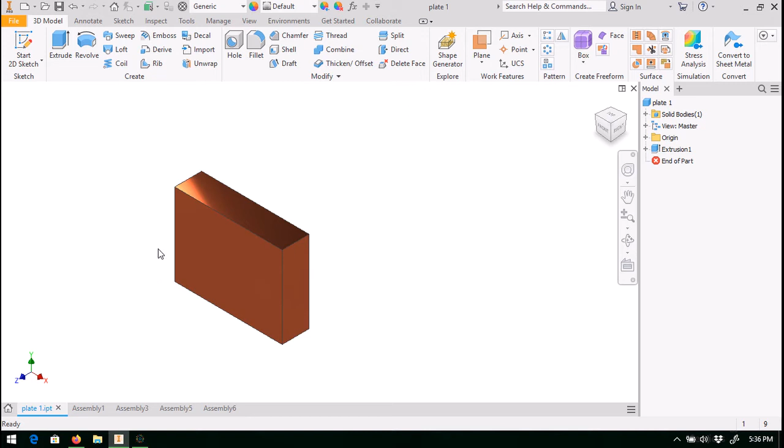To create the assembly, come to File, then click New, and then click Assembly.

Now there's a couple of different ways to bring parts into the assembly module. The first approach is to use the Place icon up here, go find the file, and bring it in. Another way is to right click, hit Place Component, and go to the folder with your part. In this case, I want to open up what I'm calling Plate 1, and then hit Open.

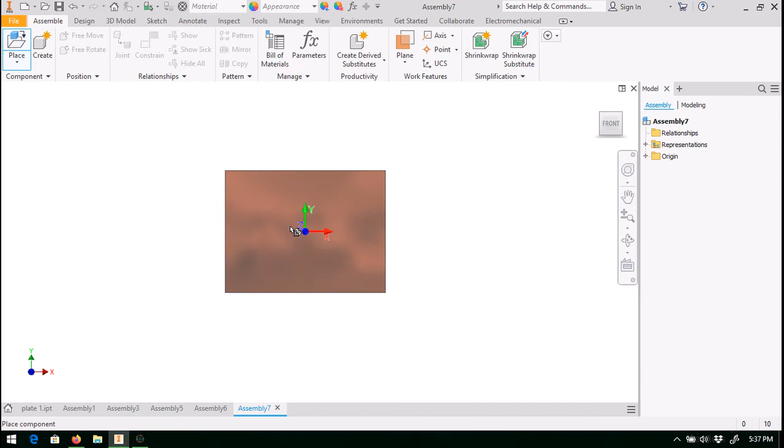You can move the part to pretty much any location on the screen with a left click, and as I move the mouse around it will let me create multiple instances of the same part. In this case I just want the one part here, so I'll click Escape, and then repeat this procedure for Plate 2.

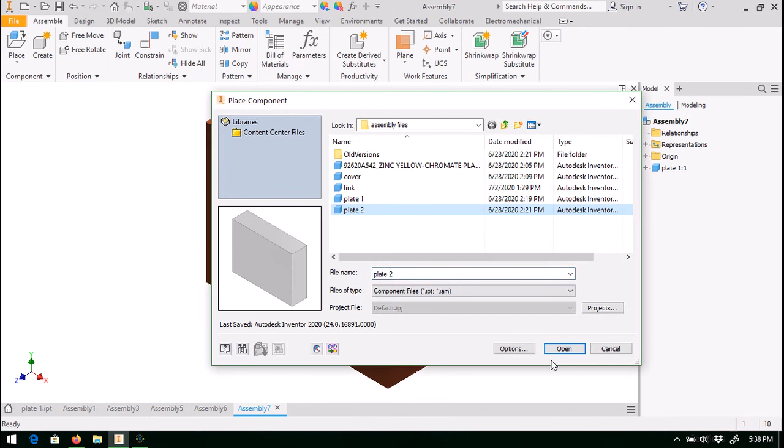We'll just left click and then click OK. So I now have an assembly, because as long as I have more than one part, I've created an assembly.

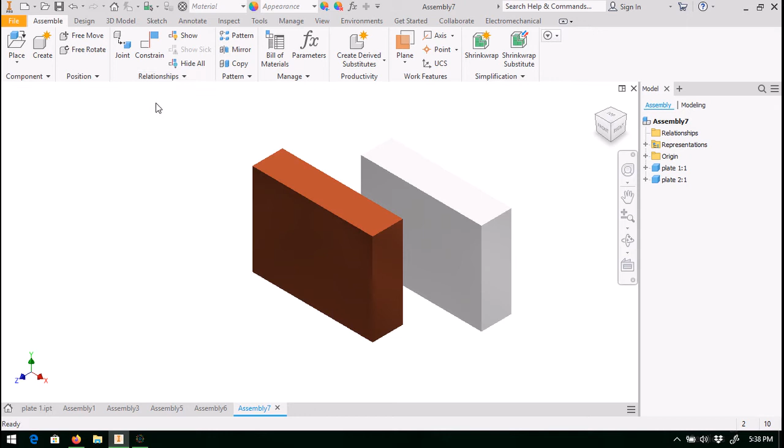To show you the most basic way to put things together, come up to the Relationships section and click on Constrain. Under the Assembly tab we now have 5 different options, and one of the more common ones is the mate type.

We have 2 different solutions, and the difference between them comes down to how the mate is oriented. Notice we're looking at the surface vectors: in the first one, known as mate, they're opposing one another, pointing at each other, whereas in the flush solution the vectors point in the same direction.

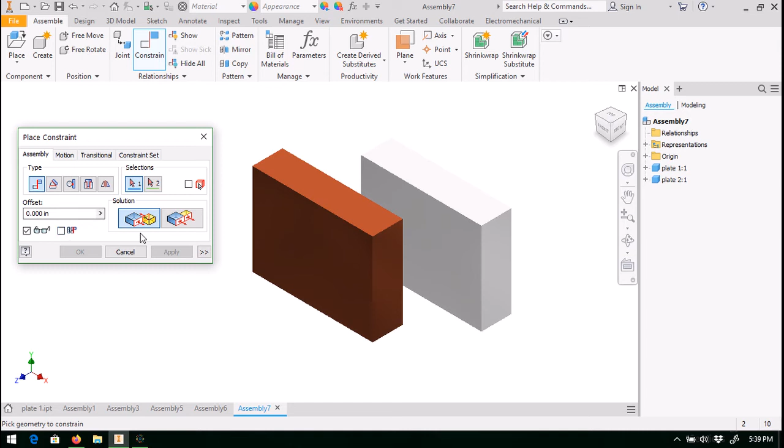For the sake of argument, let's click on mate, and look at the mate solution. Let's mount this surface to this surface. I should point out that what you're seeing right now, after that audible popping noise, is technically a preview of the mate. The mate is not actually created until you click OK or Apply.

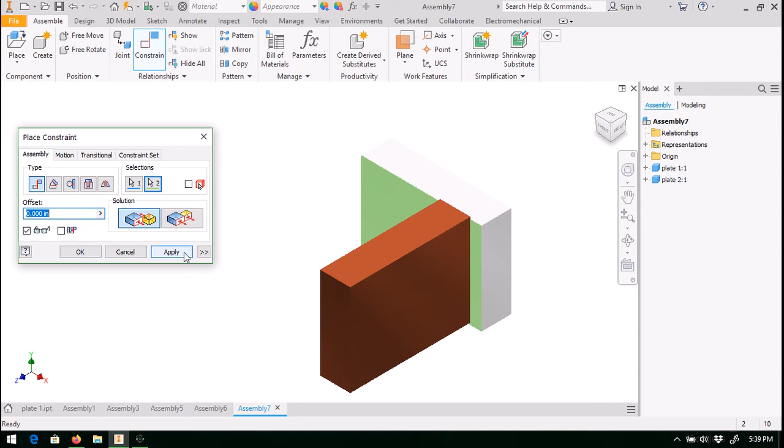So if we were to hit OK, the other thing I'd like to point out is that the mate itself is tied to your part. If you ever want to come back and delete the mate, you simply right click and you can delete it, or you can edit the mate as well.

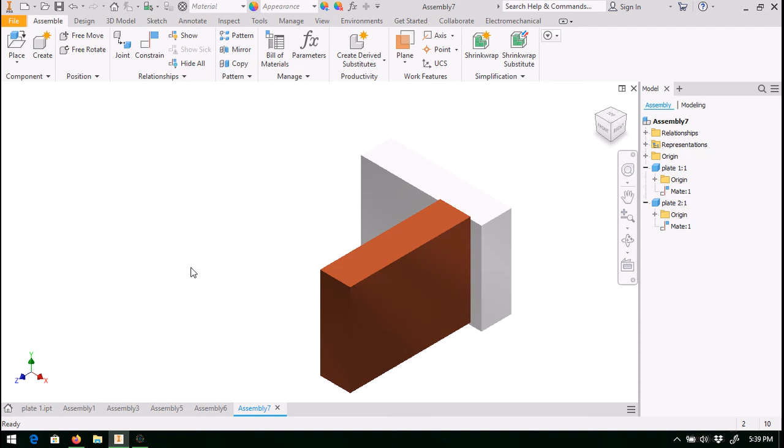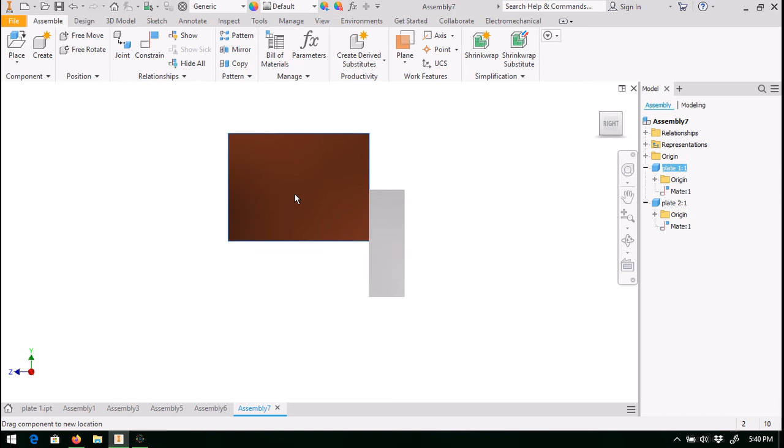Okay, so what did that do? When we mated the parts, what does that mean physically? Well, if I orient using my view cube, left click and hold, then move my mouse up or down, you can see I'm moving one of those plates, but the other one is still touching it. At the same time, I can move everything to the left or right on the screen, and again I'm maintaining the connection between the plates.

Let me show you that in another perspective, that I can move everything around, but these two surfaces are still touching. So the next thing I'd like to show you is, often when placing components, you might have to have different features located relative to an axis, a plane, or some other surface or feature, at a specified distance.

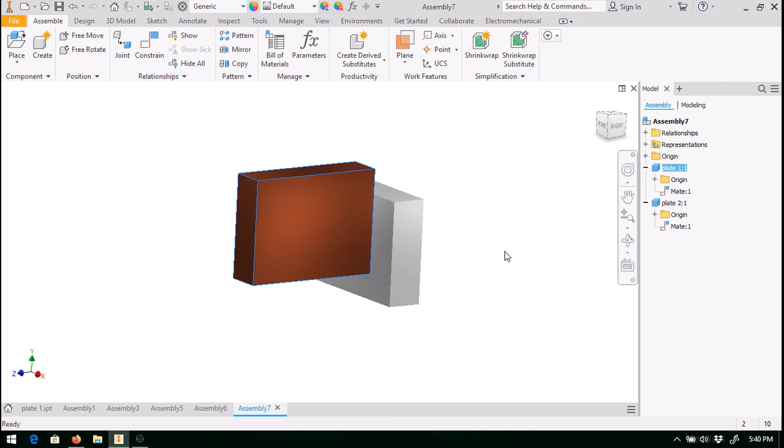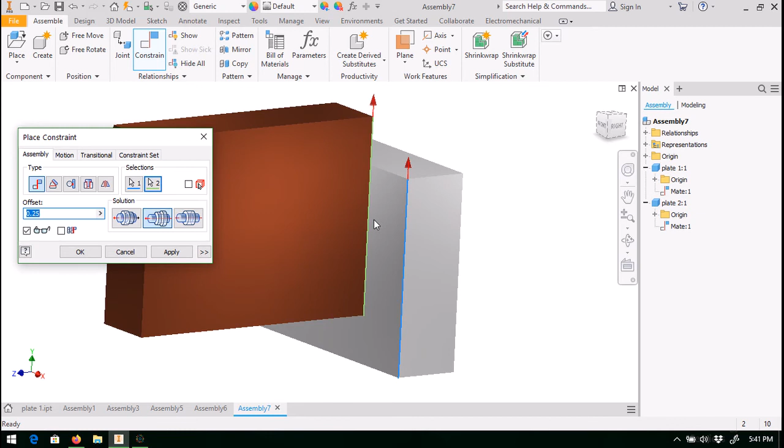For example, if I come into Constrain and type in, let's say, 0.25 inches, maybe I want a precise gap between these two edges. So I can click on this one and this one, and now I have a defined distance of 0.25 inches. If I ever wanted to verify that, I can come up to Tools, Measure, and measure the distance here, and you can see that.

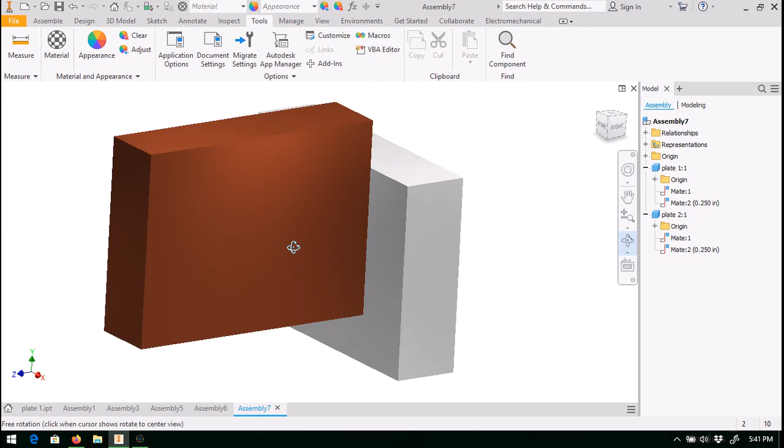Now what I'd like to do is show you an example of flush mounting. In this particular case, let's say we want this surface and this surface flush with each other, so there's no offset between them, no little ledge or gap, as you can see. So how do I do that?

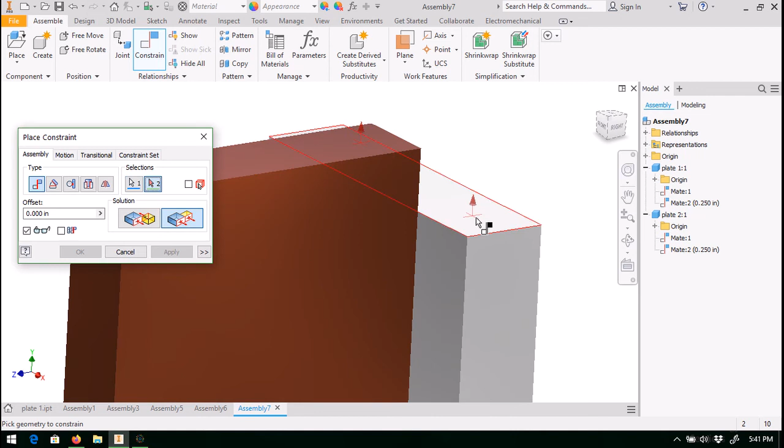Come back into Assemble, come up to Constrain, and make sure Mate is selected, but now select Flush. Pick this surface, then select this other surface, and hit OK. You can see over here we have several mates being shown, and now we have what is known as a flush type arrangement. Hopefully that shows you how to manipulate really basic shapes using the mate command.

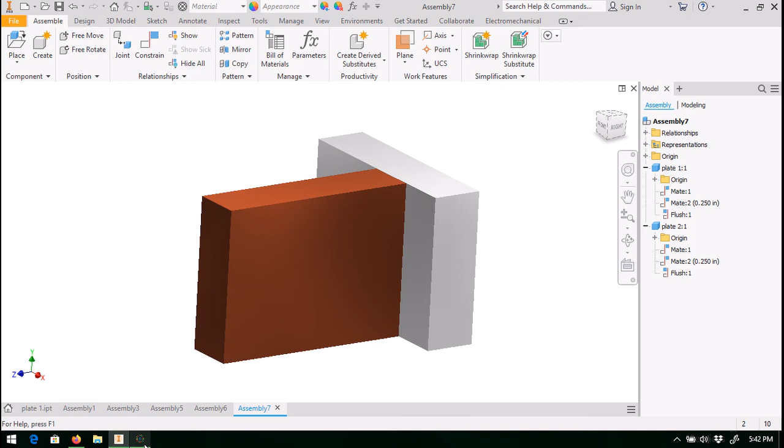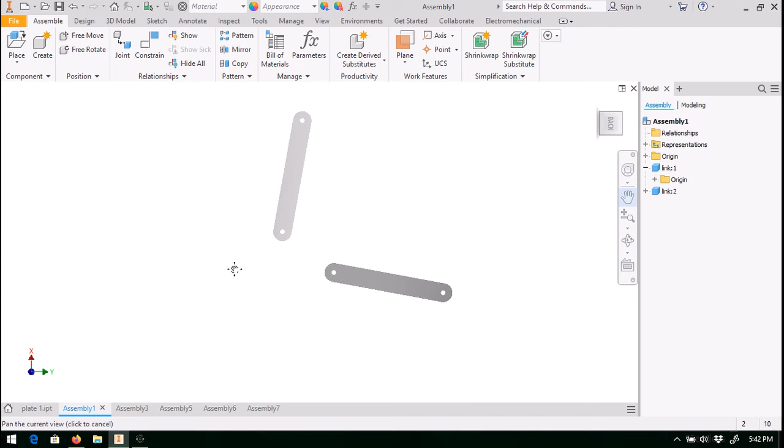The next one involves using the mate command, but what we want to do is have an angle between two parts. Maybe we don't have an offset distance that's so critical, but we have an angle we want to enforce. So to show you how to do that, I basically have these two links, maybe part of a linkage or a frame type assembly, and I want to use maybe two things.

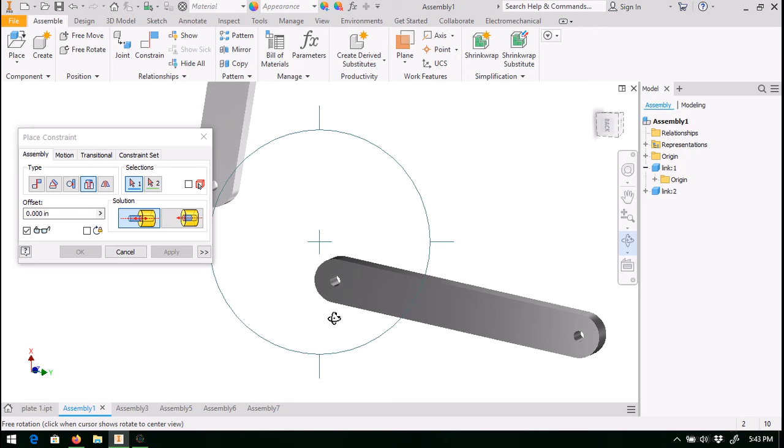The first one I'll show you is maybe an insert command where we'll get the center axes of these holes lined up so everything works as intended. So I'm going to pick that one and maybe this one here, and then hit Apply, and you can see that we have our links here, and I can move them around if I want with the mouse.

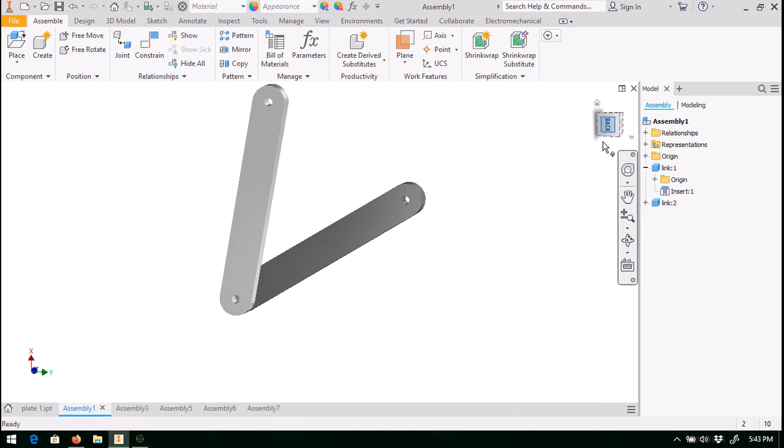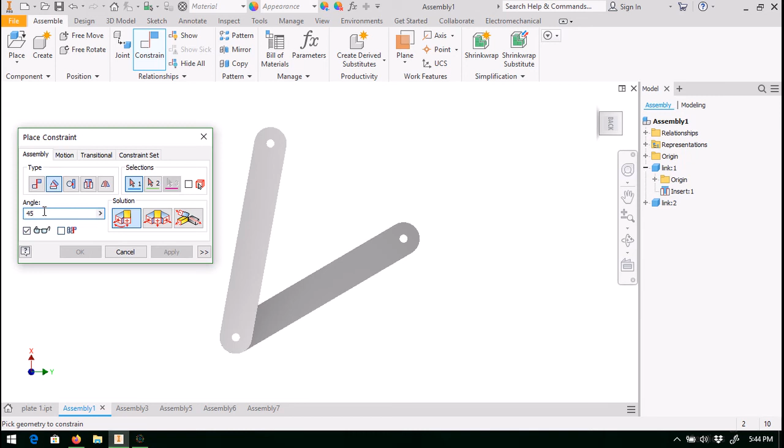But now let's say, what if I want like a 45-degree angle between these two? How do I do that? Or a 90-degree, how do I do that? If I go to Constrain and now go to Angle, we see three different solutions pop up, and I'm only going to look at this first one, known as Directed Angle. So if I pick Directed Angle, let's start with 45 degrees, and I pick some lines here to create that constraint.

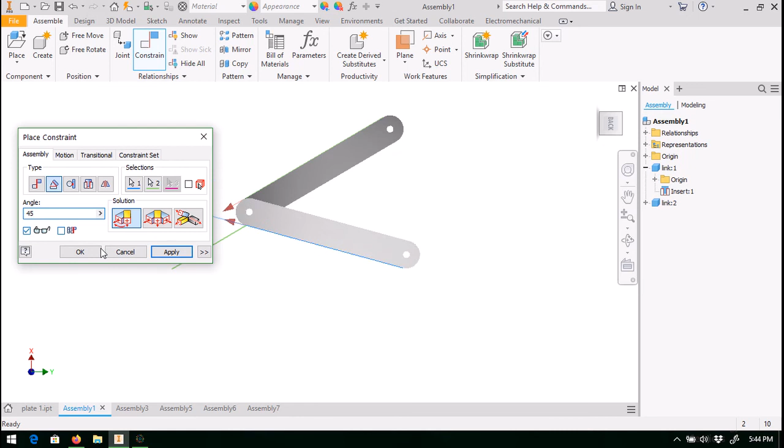I'm going to pick maybe this line and this line, and you can see that we have a 45-degree angle shown there. Likewise, I could change this to 30, or I could change this to 100 degrees. Pretty much any angle that you want, you can enforce. Alright, so that takes care of that one.

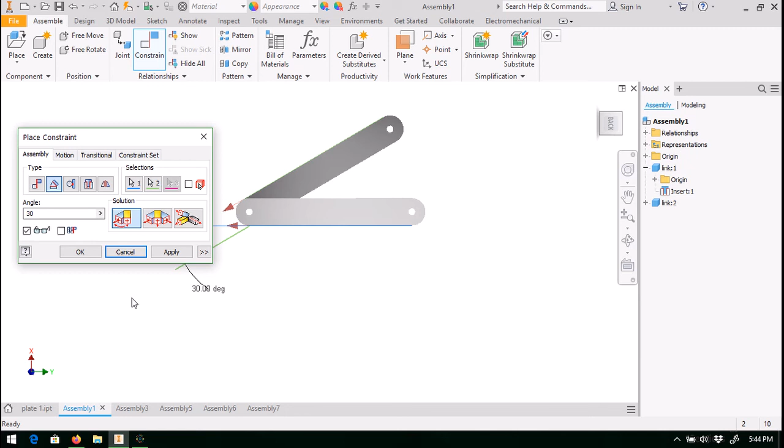The next one I'd like to show you is looking at the insert constraint, because often in many practical situations you're dealing with bolted connections or shafts perhaps going through bearings, that sort of thing. So how do you put those together? What's an example of that? That's the next one I'd like to review briefly.

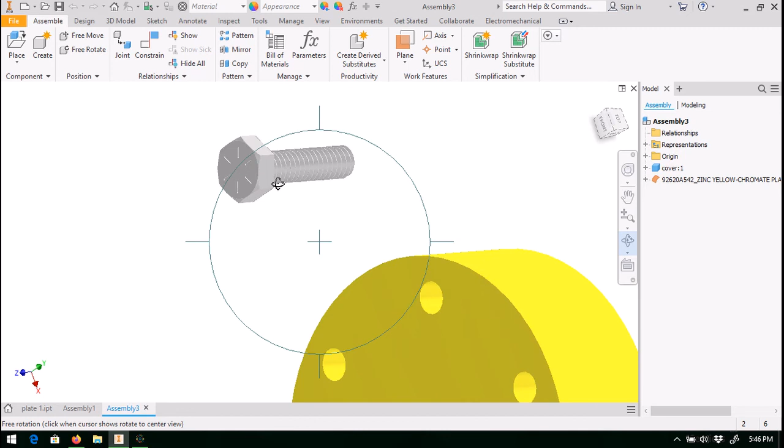In this example I have this cylindrical extrusion, which contains some holes, and then I have this bolt, and the objective is to insert the bolt into one of these holes, just to show you how to do that. There are a few different ways.

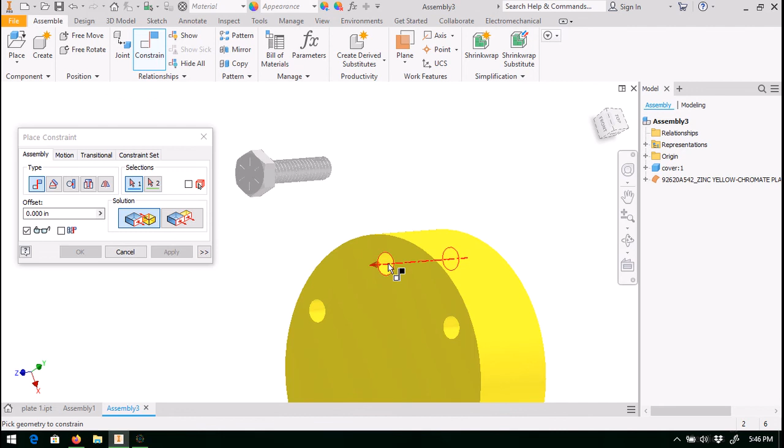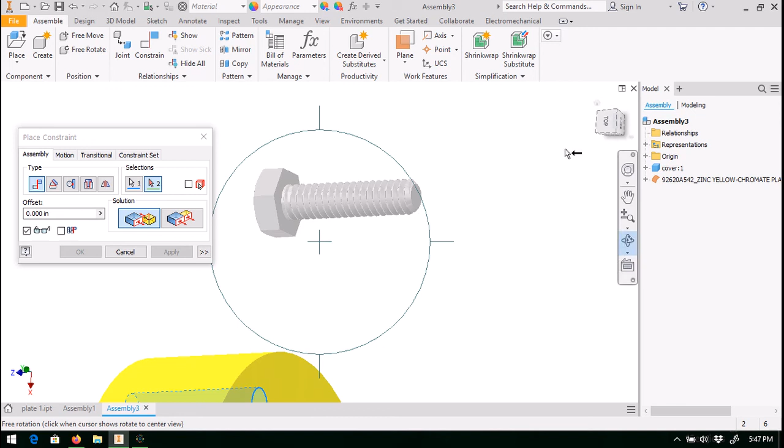If we wanted to consider an approach much like the first one we looked at earlier, using the mating commands, I can come back up to Mate, and notice that when you leave the mouse hovered over a feature, if you wait a few seconds a drop-down menu will pop up, and you see I have different selections. I want to look at this face here, and I need to find a surface on this bolt to use for the mate, and I can probably use this one.

Alright, so that inserted the bolt, and what I can do is move the bolt, click this... oops, I lost it because I didn't hit OK. Let me start over again.

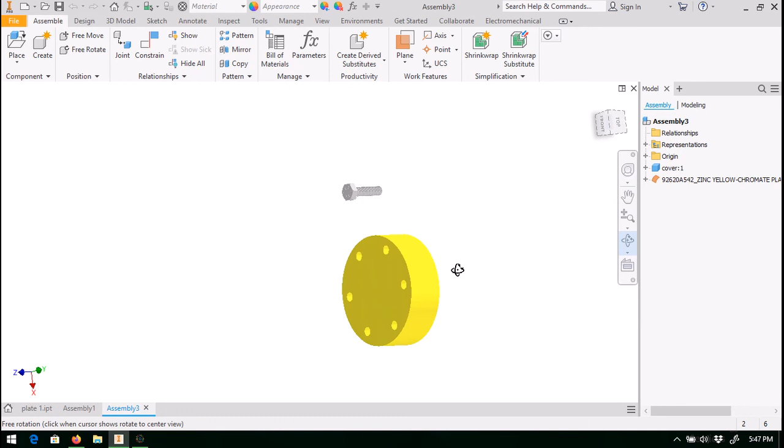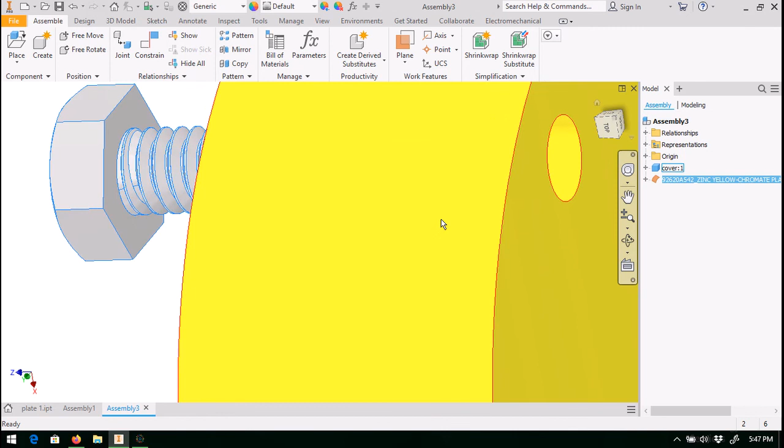So let's come back up to constrain, let's pick that surface again, yep, and then let's come back up to the bolt. Probably I can get away with this and then hit OK. Alright, so if I move the bolt out, we can see that the bolt is in the hole, and the objective might be to have the bolt flush, the head of the bolt flush with this top surface.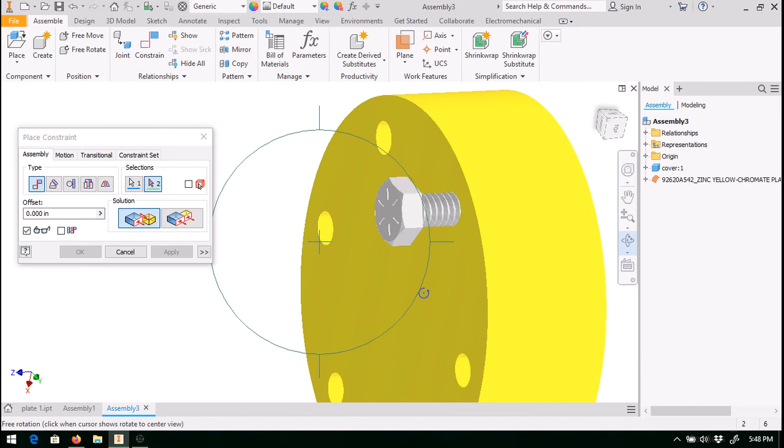So to do that, what I can do is hit constrain and then click this bottom surface of the bolt, and then click the top surface. Notice that the orientation is wrong, and to fix that, because right now it's on mate, if I want to flip around the orientation of the mate, I'm going to click on flush, and that gets me kind of what we wanted. Alright, so let's bring in the bolt once again, just another instance of the bolt.

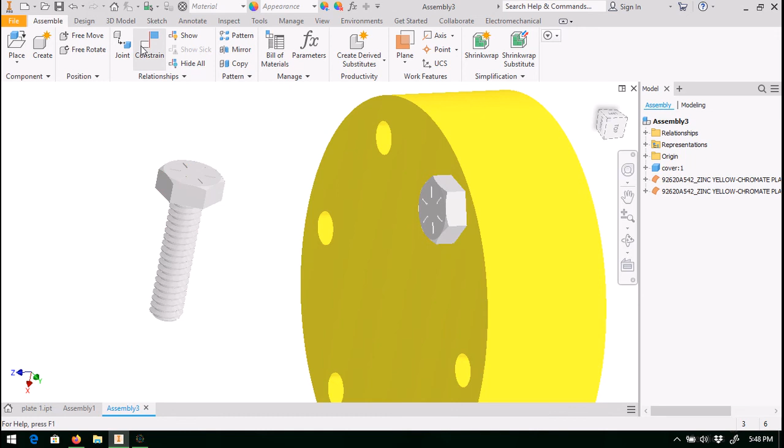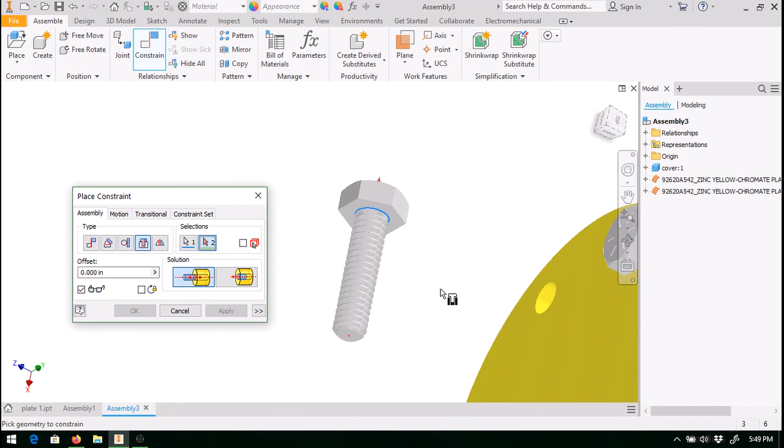Now we want to use the insert command. To do that, I'm going to come up to constrain, and we're going to use the insert, which is the fourth one from the left. In this particular example I want to pick this edge that's shown here, because that edge will also be flush with the top surface of my cylindrical part, and then I have to pick the other part, and I'm going to try to pick this center axis. Again, if I just flip that around, you see we have basically the same type of result that we had in the first case.

Okay, alright, so in a nutshell, that covers some of the most essential or basic features when it comes to creating different types of assemblies with different types of parts or pieces. So I hope you found this video instructive and helpful. Thank you so much for your time and attention.